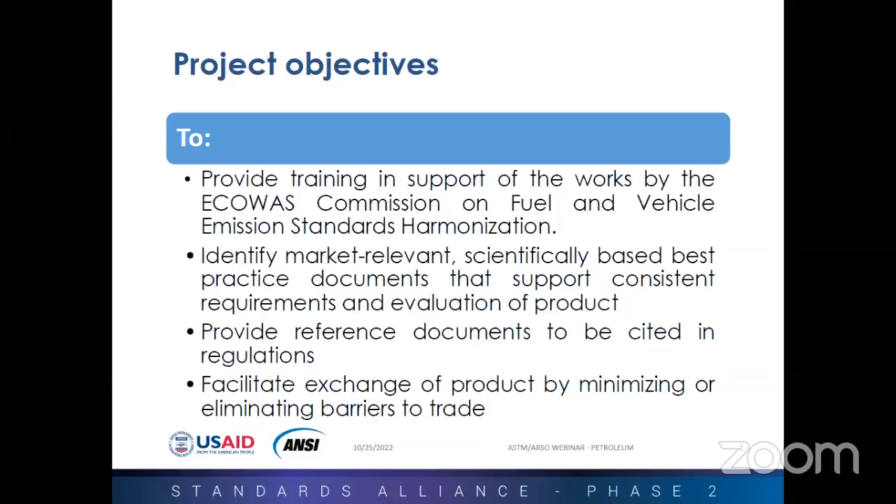From the 1st to 3rd of March, we had our inaugural meeting in Accra, which was very successful. During this first meeting and workshop, we looked at the commonalities in testing across our countries and began to dig deeper into the technical aspects of the ASTM standards.

The same year, from the 4th to 8th of July, we had our second meeting in Nigeria, where other non-focal point people found it so interesting that we even had to increase our plans to accommodate more people.

In December, from the 4th to 7th, in Florida, we continued with the D2 technical committees, giving the opportunity especially to those who serve in the technical meetings to have a better understanding of how they can go about their objectives and mandates as technical members.

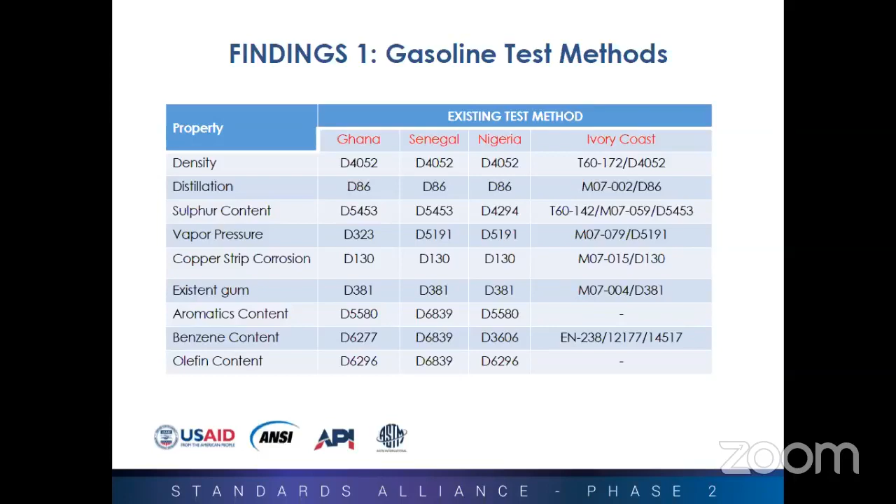So the same approach was used for gas oil, where we sent out templates for them to fill out what is happening. If currently those methods have changed, then yes, but as at when we received this, we made sure we just put what we had received in there.

Now, when you take water and sediments, if you go back to method 2709 and 1796, you realize that 2709 is more applicable to diesel than 1796, even though they will all give you results. But we are looking at it in terms of arbitration, where you need to justify your results. Which method are you going to go with?

This is where we're talking about identifying relevant documents, identifying relevant standards to back the lab work. Interestingly, this is where we got to cetane number. We have other methods there.

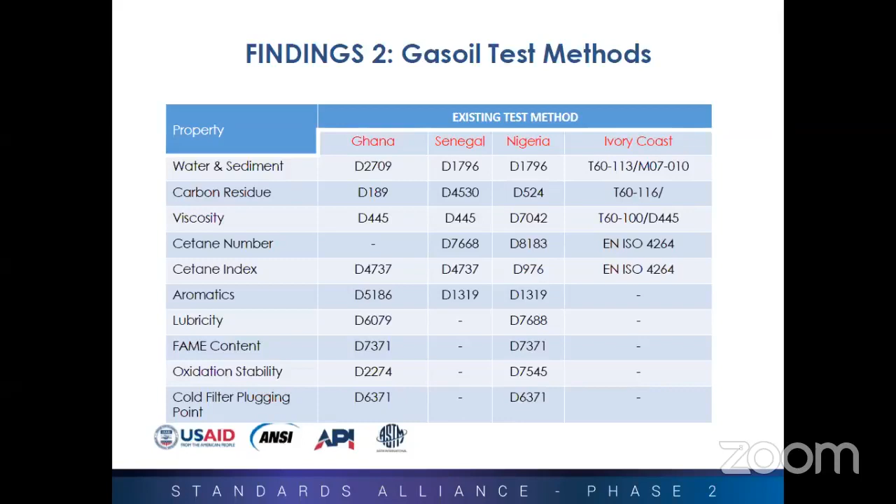Next slide, please. All right, so like I've been saying, after we had identified the differences, the gaps that exist, we had practical demonstrations in Ghana.

We were lucky to be hosted by the Ghana Standards Authority Lab. We visited their labs, and then we also visited Verity Labs Limited in Ghana. Then in Nigeria, like I've already said, we were in the SON Petroleum Lab, and then we went to Apapa to have practical demonstrations in the OVH lab.

I must say that in GSA and Verity Labs, as per the policy of the company, we're not allowed to take pictures, but we were blessed to have SON and OVH allow us to take pictures. So you can see the next slide where we have pictures of the visits.

This is where they visited Verity Labs in Tema, Ghana. On my left, we have the focal point people only, and then on the right you have other VLS staff also joining.

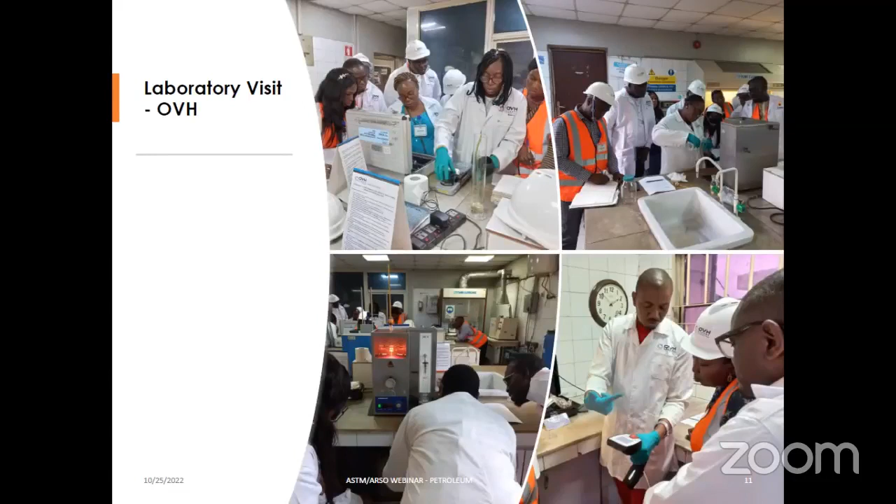This is an SGS lab in Apapa as well. We're not allowed to take any pictures, but we had practical demonstrations to buttress the need where we need to choose certain methods over the other.

Next slide, please. Yes, so there were important standard relevant documents, market relevant documents that we need to cite in our day-to-day activity, whether we are a technical committee member, whether we are a lab person, and all that. So we were guided by the diesel fuel standard ASTM D975. We also looked at the D4814 for petrol or the spark ignition engine fuel.

Then within our Africa region, it was important when you look at the good work that has been done by the team of ARSO. There was no way we could leave ARSO out of this. So we also looked at the ARS 1362, 2021 and 1363. We looked at other documents like the ECOWAS limits. We also looked at the individual West African countries standards, and then all this formed the basis of our conclusion.

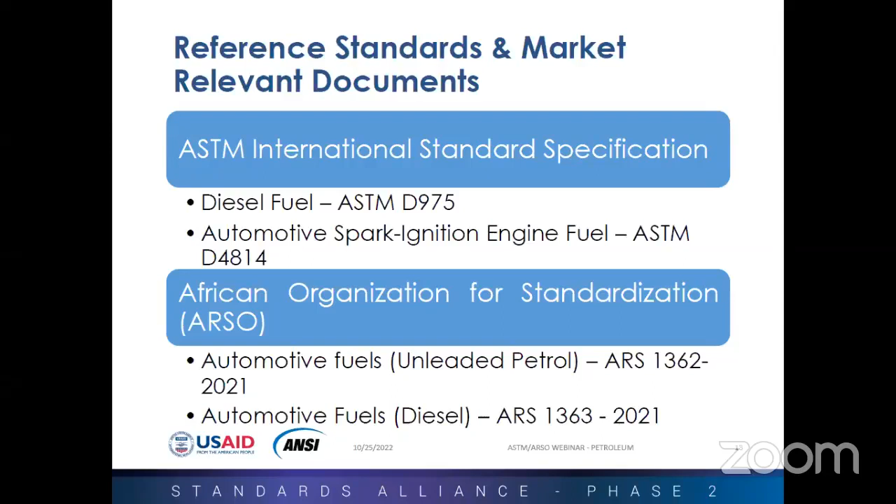Next slide. And so we had a very good discussion, a very good identification, and then what we set out to do in terms of the objectives of the Standards Alliance project, which is ongoing, the targets and objectives are being met.

We've been able to identify existing gaps in test methods in the member countries. We have also identified how to select the right methods, how to document, and how to have a consistent approach, whether it's lab work or technical committee decisions and all that.

And importantly, we have been able to do what we call minimizing barriers to trade. So if the chemists in Lomé, Nigeria, Senegal, Ivory Coast, and other places will be on the same page, there wouldn't be issues of demurrages, delays, and all that. Importantly, we've been able to form that network where we constantly and continually discuss, exchange ideas, and then move on from there. Next slide.

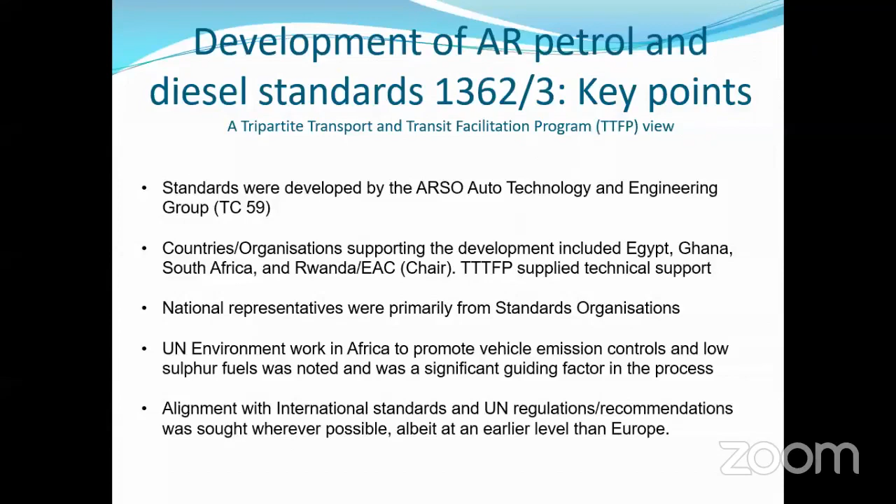So, as I mentioned, the intent of the standard was to promote and allow the use of the latest low emission, fuel efficient technology into Africa, into the future. But having said that, it didn't completely follow international. Limited deviations for local market conditions were made. Examples would be the adoption of a lower diesel density to accommodate the synthetic fuels industry, which is a major player in South Africa, but it is also active in Nigeria, I understand, and there are plans in Mozambique as well.

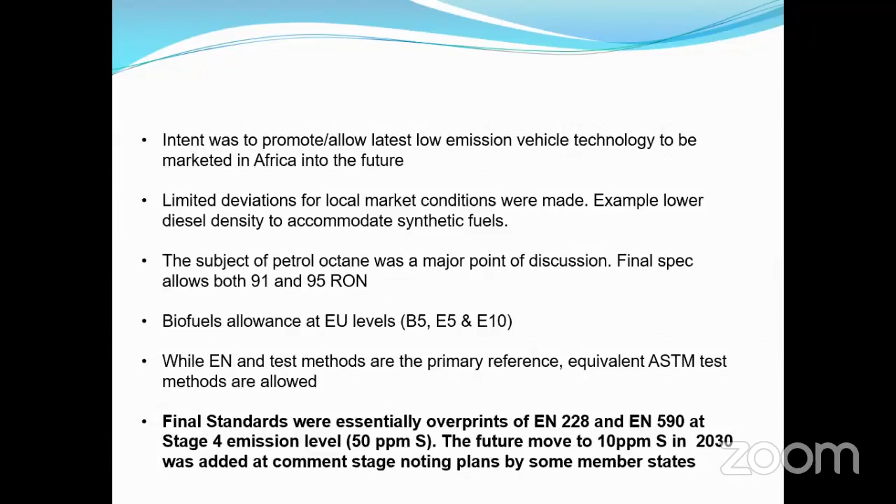Okay, just on the subject of fuel testing facilities, I'm going to use the example of South Africa, and this is based on my experience. South Africa has two fairly comprehensive fuel specifications legislated. They're very similar to those in Europe in terms of parameters. The refineries can all test to those specifications. Well, they must do; they're legal requirements. But there are some private testing facilities as well, and government does have an SABS laboratory. I'll put a question mark there whether SABS are currently active in terms of fuel testing.

But outside of the refineries, and also looking around Southern Africa, the testing done is primarily driven by industry, and so the testing is primarily focused on diesel parameters. But from the motor industry side, I know when we're trying to get samples done from vehicle failures, you find testing is expensive, and sometimes, if you're looking for an independent result, it might even require the samples to be sent overseas.

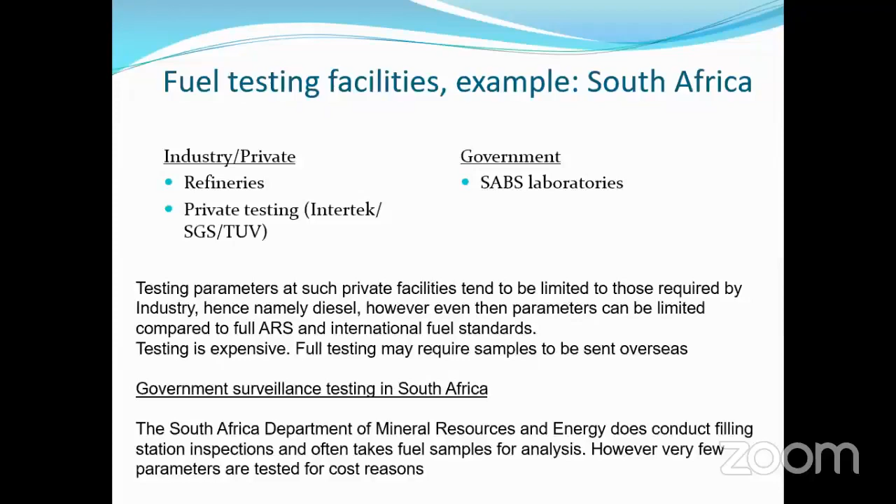So how does the motor vehicle industry monitor fuel quality in the market? Now there are different ways one can look at it, of course. Some countries have mandatory fuel specifications. Well, surely that's a guide. Nobody would break the law, would they? But that's actually unfortunately not always the case.

So what the motor industry does worldwide when it looks at a particular country to determine whether they can release their new product into that market is that they get very comprehensive analyses done of fuel samples in the market. And this is done by a private company. I won't single out the name, but I think most of you are familiar with it.

Those samples are usually taken in market and actually taken back to labs overseas, and a very detailed analysis is done, with a lot more parameters than would be, for example, laid out even in the EN specifications. And that information is used by the powertrain engineers to determine acceptability of the new technology into those markets.

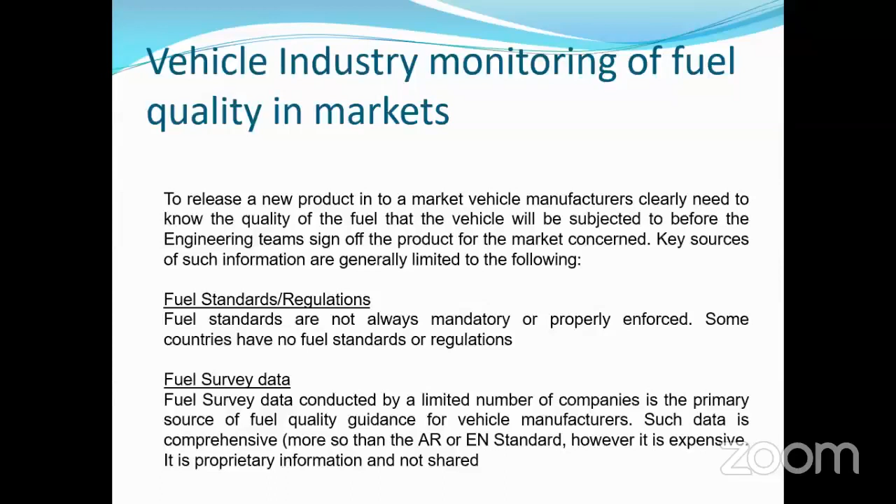Okay, I'm going to have a quick look now at how the whole situation is handled on vehicle emission measurements, because I think there's a bit of a parallel there that is worth reflecting on. So vehicle emissions, we talk about Euro 2, 3, 4, 5, 6, 7, the vehicle is actually tested in a laboratory. This one is actually from my old company at Ford. The vehicle is actually run on a rolling road dynamometer. It runs under a certain test cycle with a certain reference fuel, certain temperatures, etc.

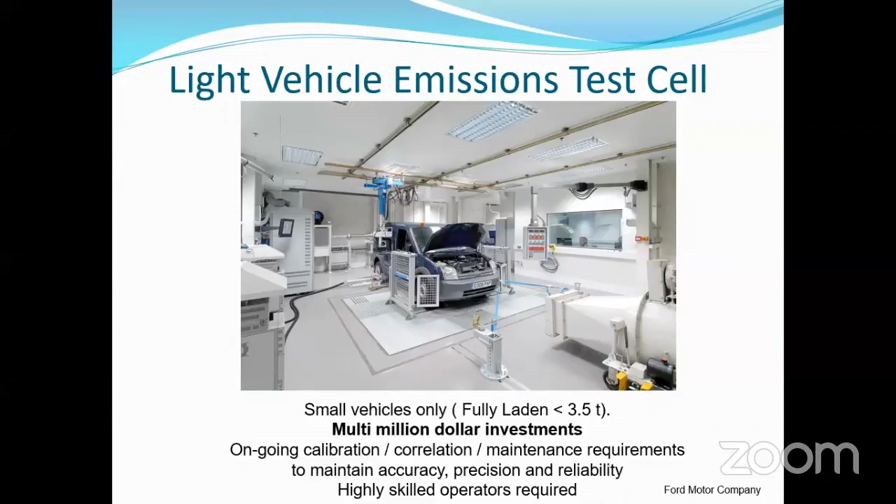There isn't any of these which do the full Euro 5 and 6 test as a type approval in Africa. There are some facilities in South Africa that do the partial test, and perhaps can do Euro 2 and perhaps stretch to Euro 4, but certainly not doing the full test, including the low temperature measurement. So let's go to the next slide, which is just a diagrammatic of how it all works with a vehicle there. I think most of you will be very familiar with this.

It's all covered under ECE Regulation 83. It's a document, I think about 500 pages long, because each aspect of this test has its own standard. And as I say, it's just economically not feasible to have this type of facilities in all our countries in Africa. So is that actually a problem? Well, let's move on to the next slide. Well, it isn't.

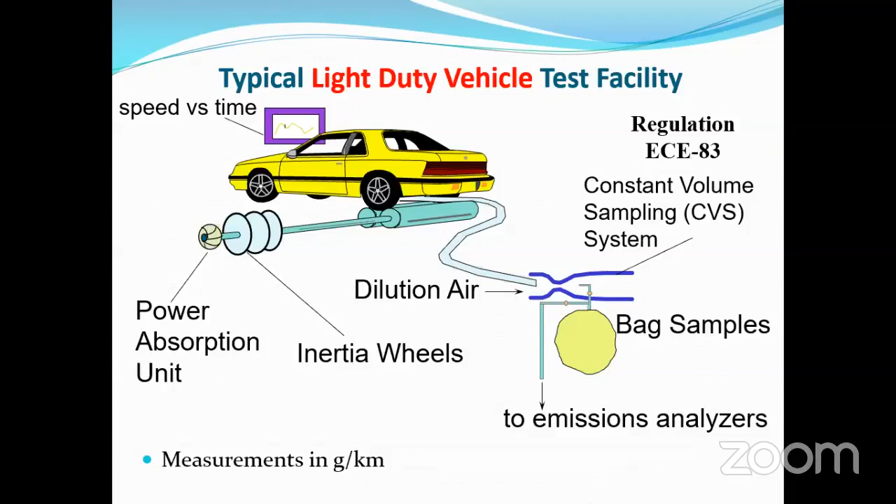It isn't a problem, and an increasing number of countries are actually requiring new vehicles to meet these regulated emission standards. We're only at Euro 2 in South Africa, but Kenya is Euro 4, and I think other East African countries have now moved to Euro 4, and I believe West Africa also is moving to Euro 4. So does it mean that we need to build these test facilities to certify new vehicles coming in to these Euro 4 or whatever requirements? And basically, the answer is a big no. It's just not possible. It's not financially possible.

So if you look at something like the Kenyan emission requirements, which are part of the vehicle roadworthy test requirements, there's a little clause covering new vehicles, and they simply specify that the vehicle shall be type approved to EU emission stage X, that's Euro 4 in the case of Kenya, and that actually works. So the vehicle importer will be required to produce a test report from an ISO approved test facility at point of entry, showing that the vehicle meets the appropriate Euro 4 emissions standard.

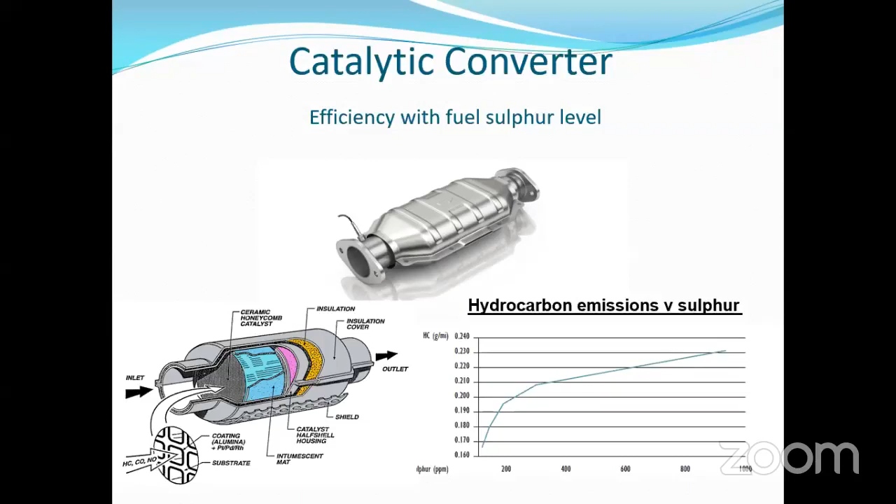But one of the big issues we have, and we see it right across Africa, and it's something which is not tested for, is this problem of manganese. I'll move to the next slide and show you. So there's a picture of the catalytic converter, and that red stuff is actually clogging. You can see where the front face is scratched there. You can see the honeycomb behind it, which is now basically completely clogged with this stuff.

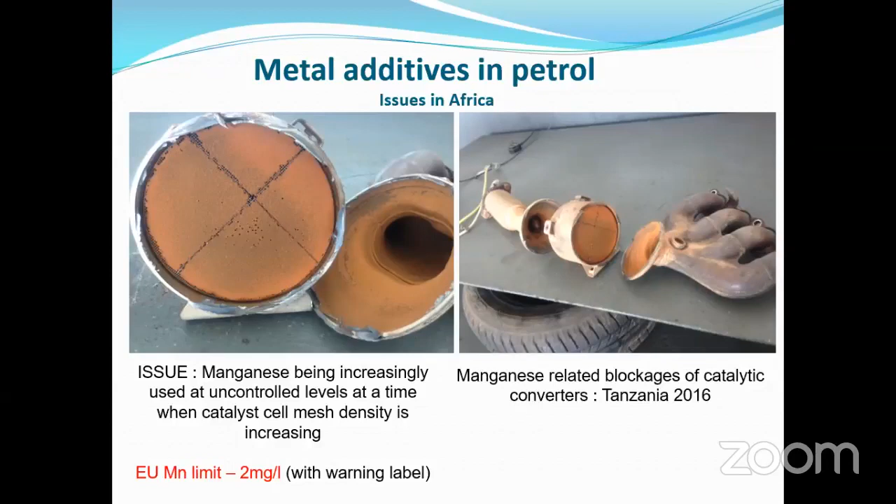And this is a vehicle back pre-COVID in 2016, and this is one of the parameters which has not been monitored. I shouldn't point out any particular country, because in South Africa recently we've had a spate of the same problem. It seems to be adulteration of fuel, or perhaps also manufacture or local distillation of fuel, and using this metal to boost the octane level. But let's go to the next slide.

This is a slide I showed at an SADC regional meeting just before COVID times, and we could see there that although the East African spec actually prohibits manganese, we also were picking up quite large amounts of manganese in Kenyan and Ugandan petrol.

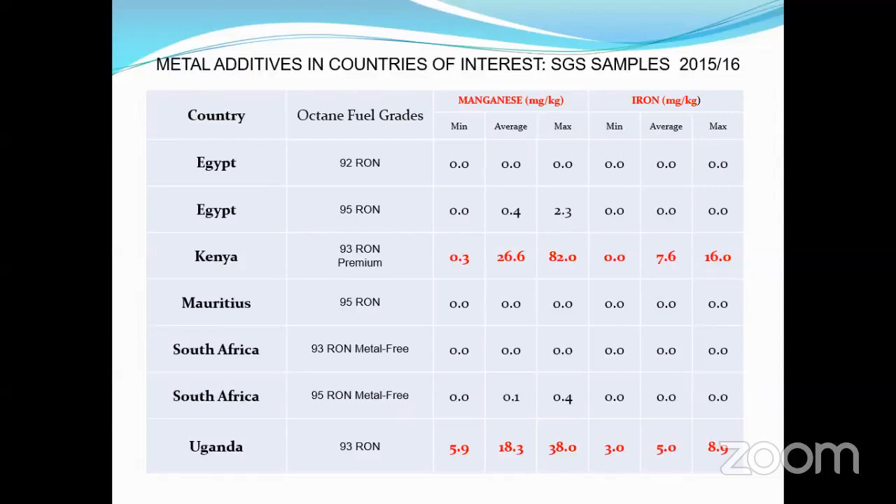For reference, you see there in Kenya an amount of 82 milligrams per kilogram was actually measured. Well, even the manufacturer of that additive does not recommend anything more than 18. And so one can see the types of problems we're having in African markets, and the need there for more measurement and surveillance. Moving on to the next slide. So yeah, just wrapping up now.

So the African regional fuel specifications might not yet have been adopted directly by any countries, but they are providing direction to many countries in Africa working towards cleaner fuels for more fuel efficient fleets. I've been speaking to our own Department of Mineral Resources and Energy in South Africa. Certainly they are mindful of it. Will they adopt it lock, stock and barrel? Probably not. And I've heard other comments in East Africa, similarly.

So while testing facilities across Africa might not be able to test a full list of parameters of the ARSO specification, this should not be considered a barrier to the implementation of such specifications. What I'm saying there is, in the same way as vehicles are accepted based on test reports done overseas, we shouldn't be averse to allowing fuels to be similarly allowed, rather than just a very short list of basic parameters which is so often used.